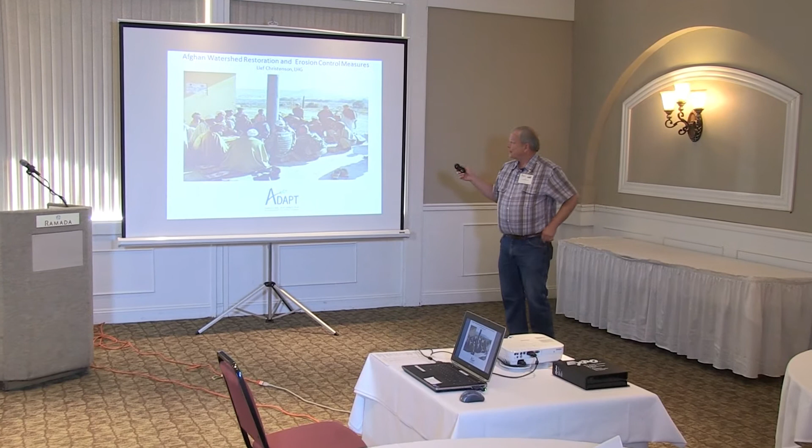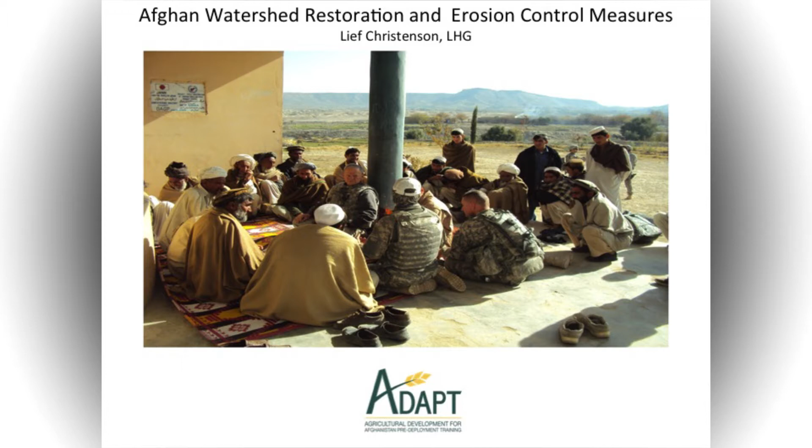Well, I've been working in the private sector for some 30 years. I'm a geologist. I've done all kinds of stuff, but mostly have gravitated toward construction management in the last 20 years. In 2008, I found out that the Corps of Engineers was looking for people to help them over there. So I found out who the lead engineer was in Kabul. I sent him my resume, and 10 minutes later he called me, hired me on the phone, and I was over there in 6 weeks.

And at that point, they put me in brigade headquarters in Khost Province, eastern Afghanistan. The map's over there, so I won't get too specific, but at the time the 101st Airborne had 6 provinces in eastern Afghanistan. And we were a center for CERP spending. Does anybody not know CERP? It's this money that's provided by Congress for us to do development work.

In 2008, our goal was to outspend everybody else. At division, we had, I think, 4 active brigades under division, and we were in a race. And by God, October, we threw our pencil down and we spent more money than anybody else. We built roads and schools and hospitals, solar-powered street lights, wells for communities, all this various different stuff.

I was what they call a brigade PRT engineer, so all the projects from the PRTs and the ADTs would come to me for review. The colonel said I had his review pen, but I seldom used it because we were trying to outspend everybody. So pretty much if you had a fairly decent set of plans and your costs were reasonable, then you got approved. It was pretty wild. I mean, we built a lot of mistakes.

When I was with the 101st, they found out that I'm a licensed hydrogeologist, so they asked me to manage a water study for them. So over 6 provinces, we did, mostly through remote sensing, a large study that looked at all the valleys and where we could put in irrigation storage dams.

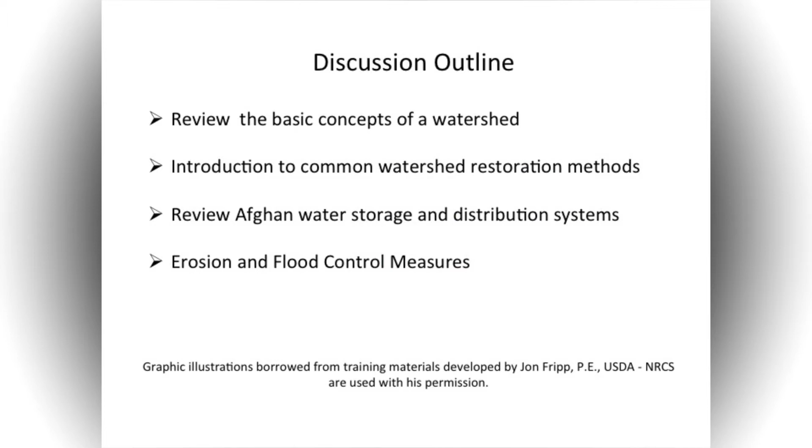What I'll go through here in the next hour, talk a little bit about what a watershed is, watershed restoration methods. We will briefly touch on water storage and distribution systems, and also a brief touch on erosion and flood control measures. Some of these things can be fairly complex, and I want to leave you with the impression that they're complex. So if you get involved in something like that, you call in a subject matter expert.

Make a note here that Jon Fripp from USDA NRCS, a good friend of mine, has provided a lot of the training materials. We had two watershed workshops while I was over there. I organized two of them, one in FOB Salerno and Khost, and then one in Kabul for all of RC East. And Jon came to both of those, helped with the instructions at those workshops, and a lot of the graphs and stuff he's developed.

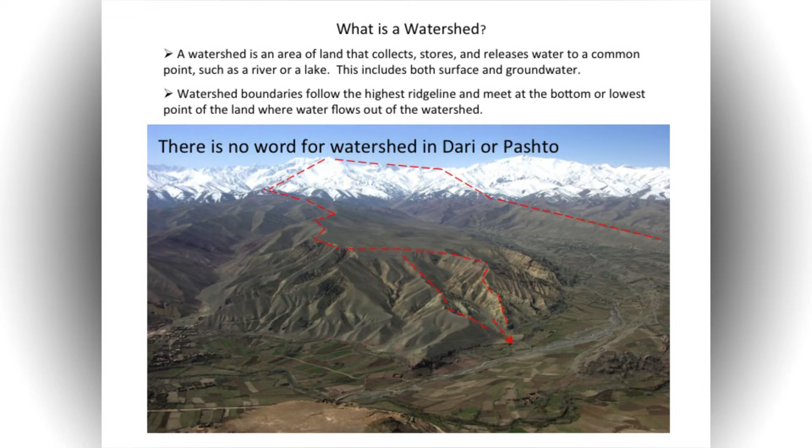What's a watershed? Now, I've never been too fluent on what a watershed actually is. I think to me they're fairly obvious. Here's the divide. Everything on this side of this divide flows this way. Everything on this side of the divide flows that way. So if you find out where the divide is, that's a huge watershed. But there's a smaller watershed right here. So, everything that falls in here is released to a common point, such as a river or lake, and that includes both surface and groundwater. We'll talk a bit about groundwater today, too. So everybody understand conceptually what a watershed is.

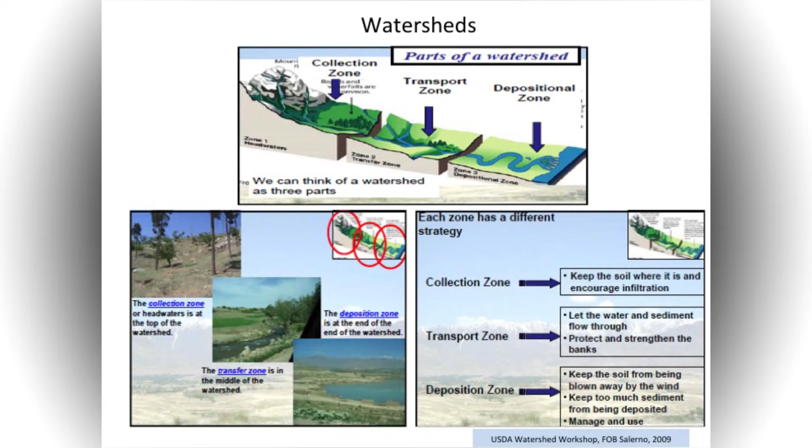We have parts of a watershed. The upper part, up in the mountains, it's called the collection zone. Down here where the rivers have formed and they're still fairly steep, it's transport. And down here where most of the irrigation is, deposition zone.

Each zone has a different strategy. Up in the top here, you want to keep the soil where it is and encourage infiltration. Most of my theme today is to slow the water down and get it to infiltrate. Because they've taken all the vegetation out of these hillsides, we want to get this water to infiltrate, soak in, and then they can grab the groundwater later.

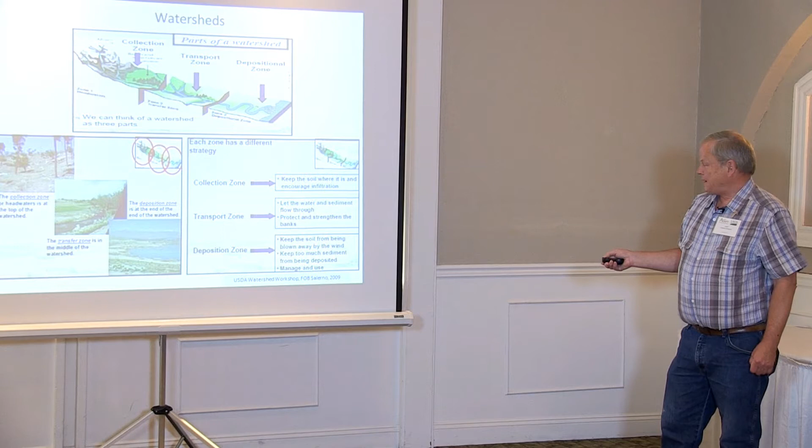And the transport, let the water and the sediment flow through and protect and strengthen the banks. This is where we'll talk about such things as riparian buffers. And down in the deposition zone, keep it from blowing away. I'm not going to talk too much about this down here. I'm mostly up slope. You have to understand the processes at work.

What do they do over there? They overgraze. If they could just, I suppose, kill 2/3 of their goats, they'd be so much better off. But if you've been there a while, you've all said the same thing.

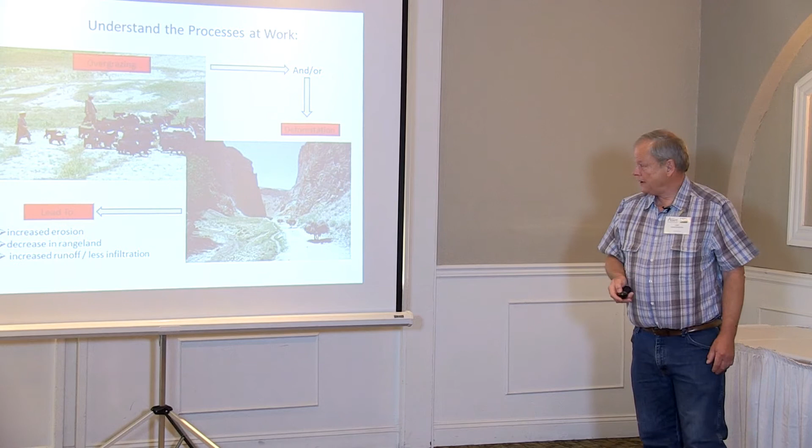Deforestation is huge. This is a picture I took up in Bamiyan province. This mule train starts at daybreak, ends at sunset. They go up into the upper watershed and haul every brush, everything they can. This is their fuel for cooking. So you're going to take everything out of the watershed, your vegetation out of there. You are going to decrease your rangeland, you're going to increase erosion, and you're going to have less infiltration.

So the basic issue, and we've known this for years over there, everybody realizes this: if you don't have the vegetation, you're going to lose 55% to runoff rather than 10% to runoff. So our main goal is to increase infiltration up there.

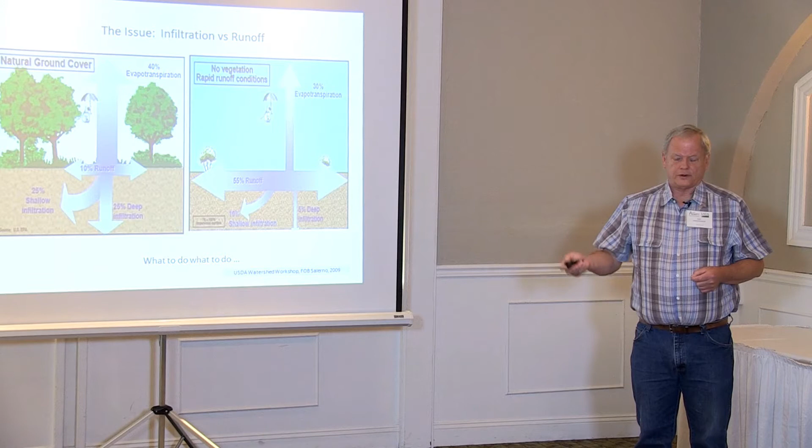There's a couple things you're called on. We need more water for agriculture. We need more water for drinking. But we also have these flash flood events all the time that take out part of the village. These flash floods are also mitigated by increasing infiltration.

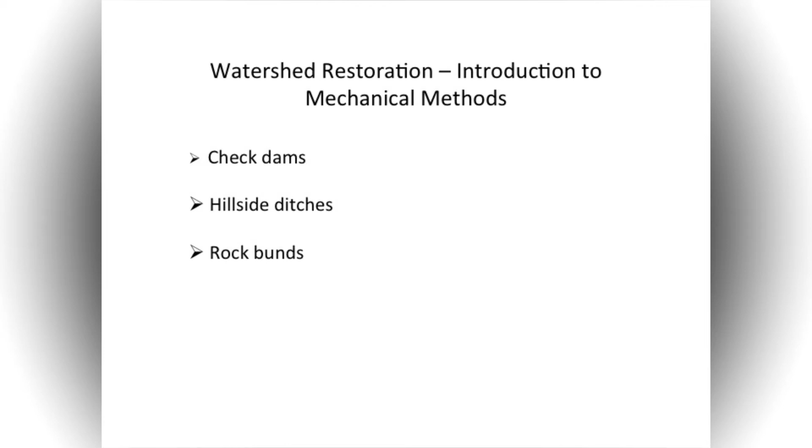I'll talk a little bit about the mechanical methods of doing watershed restoration. I call them mechanical methods. What's the best thing to do? The best thing would be to reestablish the vegetation up on the slope. Let's get rid of the goats. Let's manage our grazing. Don't have the goats eat through the seed cycle every season, and they do. That would be the best thing.

Those are political things that take a long time. Those arrangements take a long time to get these villagers to agree to. It's between them and the nomadic tribes. I've never seen anybody who could sit in there long enough to actually make these agreements enforced and keep them going. So rather than the best method of increasing vegetation up there, I'm going to talk about the mechanical methods where we can increase infiltration.

I sure appreciate if you guys stop and ask me a question at any time.

So we'll talk about check dams, hillside ditches, and rock bunds, three of the most common methods we use out there. Check dams are up high in the collection zone. They can be in the transport zone as well. Classic check dam with my friend John Fripp.

This is the noisiest slide, Colonel, that I've got, because I would get kicked out of the bub with a slide like this. But let me just read this one through, and we'll all know what check dams are now.

They're small dams. They're put in gullies. They're loose rock structures. They're not meant to stop water. They're meant to slow water down. Water can come through the cracks in the check dam. That's fine. You want to slow water down. They trap sediment. They're used in open channels and gullies.

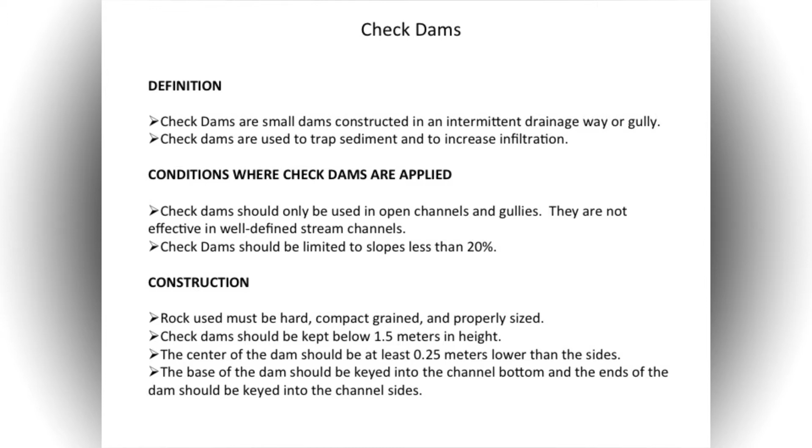I'm getting good at this.

Let's see. It has to be keyed into the bottom and into the sides. We're going to talk a lot about doing things in gullies and in stream beds and things like this. The key to doing anything in a stream bed, putting a structure in, is keying it in. That means you dig into the stream bed. You'll have to go in there a good meter or so, half meter. You'll also have to go into the banks.

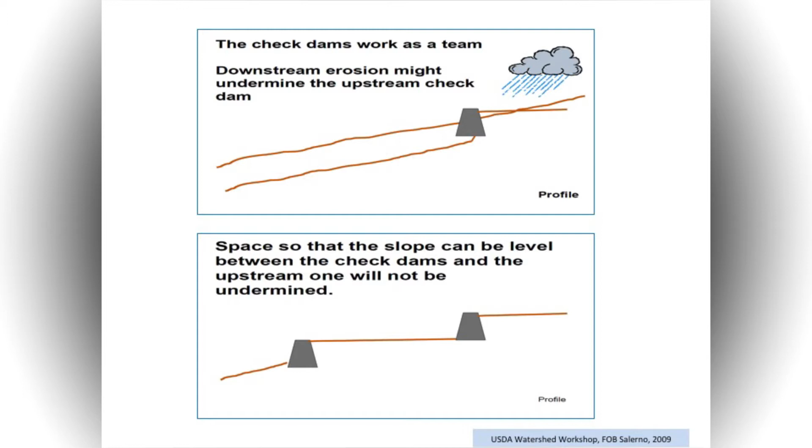Why? Because that will scour out underneath. Or the water will come around the edges, and it'll do it the first thing. If you just build up to the edge of a gully, the first thing is the water will just go around that. So you have to go to the edge of the gully and inside. So the key is the key.

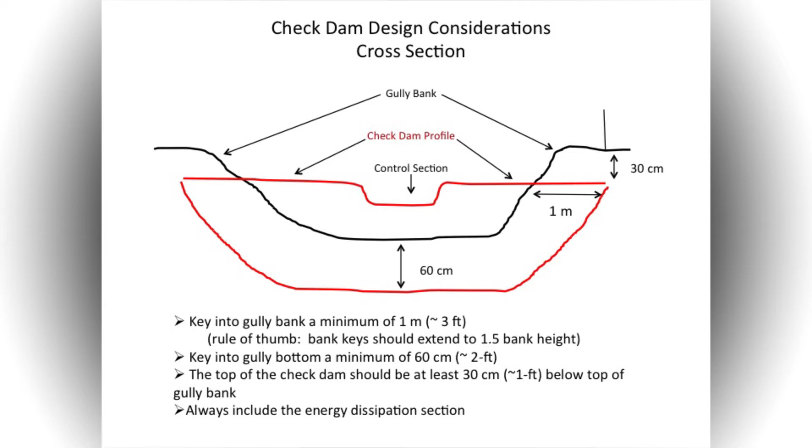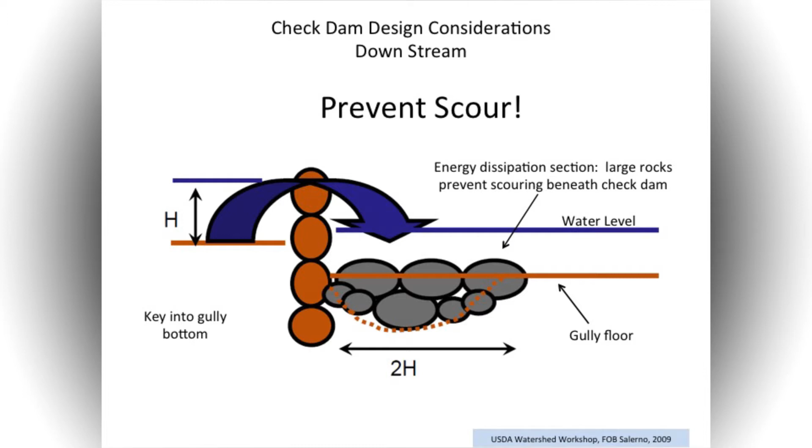Check dams work as a team. As the water comes down here and tumbles over, if you don't have anything down below, you'll get scouring down below here eventually, and you'll wash this away. We're going to do a little field exercise today. Remember this diagram, please. Generally speaking, you want the top of this dam about equal to the bottom of this dam. So depending on your slope and how high it is, you can calculate. Or I've got a chart up here that'll help you do that.

This noisy little slide just shows that this is the check dam itself. It's keyed into the sides, it's keyed into the bottom, and it's got what's called a control section in the center that forces the water out. Questions yet? All right. I certainly don't expect anybody to remember 1 meter 60 centimeters. Just dig it in, really dig it in.

As this control section, that's where the water comes out. So the water is going to come out the center of this thing. So what's going to happen? You have to prevent scour. So as that water comes out the top of that dam, build also what they call an energy dissipation section, 2 times the height of the check dam.

You've got a disc here from ADAP, and on that disc I put a lot more information about check dams and everything I'm talking about. So this is the brief overview. But just remember to go into that disc at any time. If you go overseas, you take that disc with you, probably not this big lunker of a notebook, but the disc has a lot of extra information.

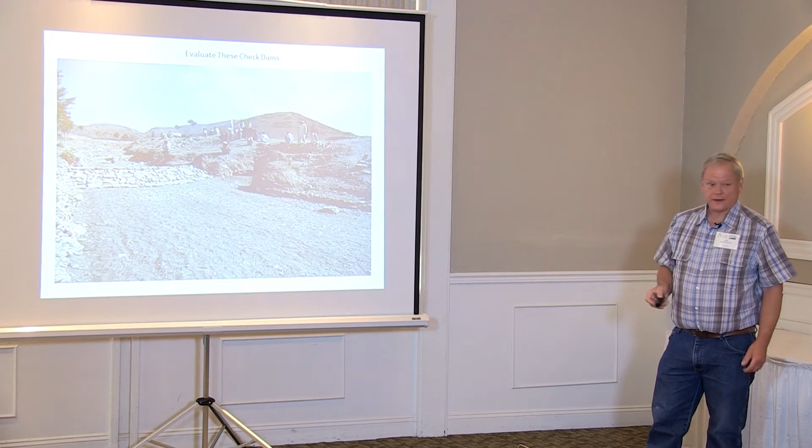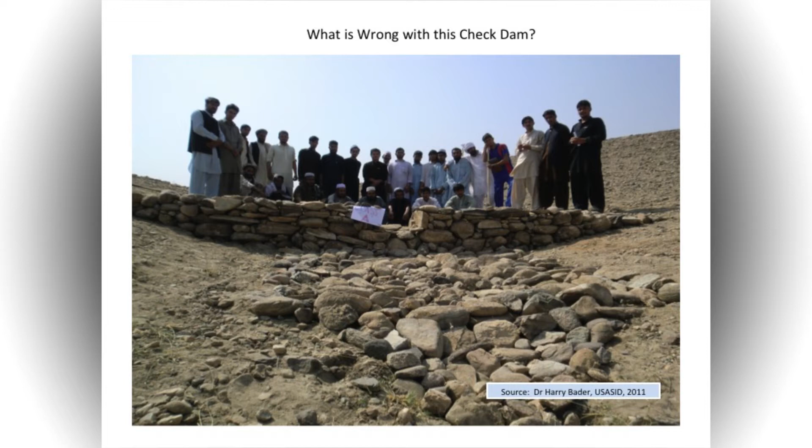So you certainly need to build a good-sized rock. You have to cut it into the banks and into there and get your control section, your energy dissipation section. You have to build them right. Okay. How about this one? This looks pretty good, except I don't know if they dug it in here or not. But this one here is a B+ at least.

Dr. Harry Bader, interesting USAID guy who worked in Nangarhar and Konar, put together what was called the Tree Army. He was just trying to find ways to put villages to work, and he stumbled across doing check dams. And he got these guys that would work together. He trained them all in classes. In fact, Harry does an hour long on his program. It's a pretty good program. He got a lot of people working together.

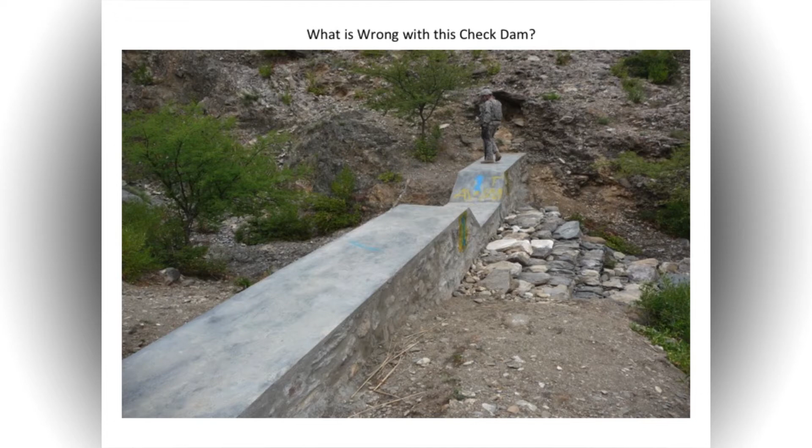I call this one the mother of all check dams. This is up in Nangarhar province, and we had to walk for an hour to an hour and a half. I mean, left the MRAPs way behind, got way up on this hillside. I wanted to see these things. The guys, they will work. They carried all the concrete and the water way the heck up this hillside and built these things up there.

You know, a check dam is meant to let water pass through. I am not in favor of doing these types of solid check dams. It was cut into the side. It was cut into the floor here. It's got the energy dissipation section.

It's got a control section. It's a beautiful check dam. I'd almost rather see loose rock that would let water infiltrate. On a dam like this and on others, when the water's going to go through this, it's going to back silt up and back here.

So eventually you're going to do something, and so going in, you're going to tell the community that eventually you're going to have to remove the silt in back of this. That should just be an O&M that they're aware of when they build these things.

Sir, I've got a question. Sure. Increasing infiltration, does that just help raise the water table? It does. It helps raise the water table, and it also stops these flash floods, mitigates flash flooding. And I'll talk just a little bit more about that soon, but the whole goal is to get things to infiltrate, not run off. You lose your water to runoff.

If it doesn't infiltrate, that one diagram that I showed, it's 55% runoff versus 10% runoff on a vegetated slope. So what we're trying to do is stop that runoff. All the water is lost to runoff. It goes down the hill, goes through the village, it goes out in the valley, and it's lost. Nobody gets to use it.

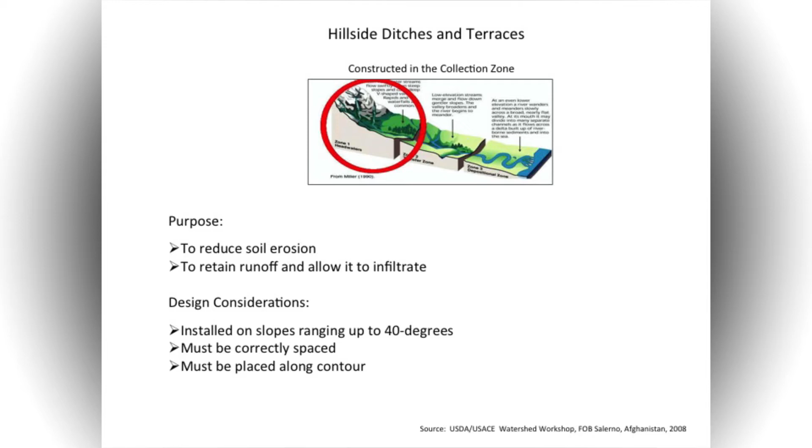So the other... Sorry, Lee. Yeah, go ahead. The thing on check dams is, it was hard for me to convince Afghans that check dams are temporary. They seem to want to build one and think it's going to stay there forever. And I was using the examples of the CCC in the 30s, going back and rebuilding them after a rainfall event, and walking the stream bed and placing the rocks back up on top, because they are really temporary structures. They're not meant to be permanent like that.

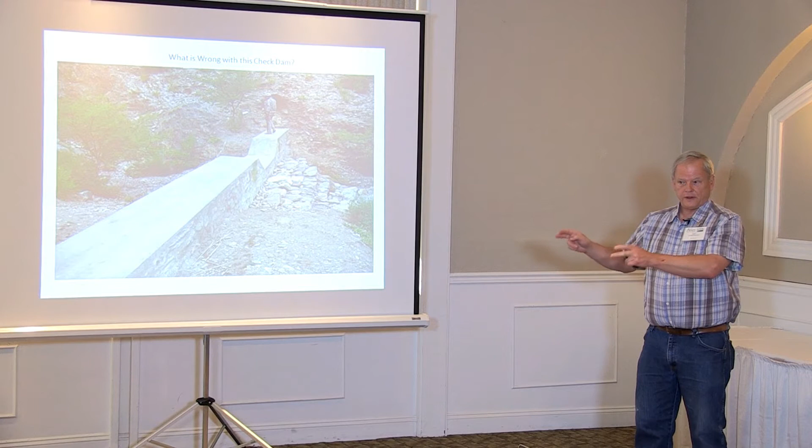Yeah, and when we approach a village about doing this, we would say it's something that needs constant O&M. Right. Every year you're going to have to go up there and repair your check dams. Now eventually, one thing is they'll fill in with silt. You could leave that filled in with silt and just make another series of check dams right down below like that. Keep doing that if you'd like. That's another way of doing this.

But they do need O&M. Some of them will wash out. Some rock needs to be moved out again. Hillside ditches and terraces. These are another way to reduce soil erosion and retain runoff. These can be installed higher on steeper slopes than the check dams. So the check dams, usually you're going up a slope like this, and above the check dams, you'll put in your ditches.

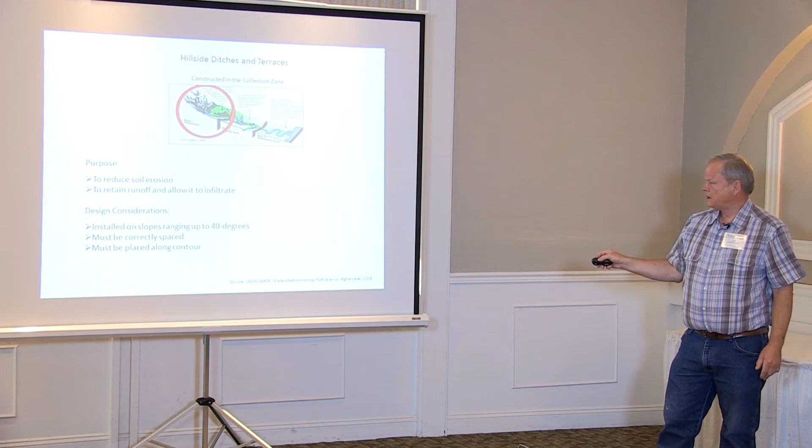Spaced, and they must be placed along contour. This is an important thing to do. We'll show you a little bit about that in a field exercise this afternoon. It's a very simple concept. These are just shallow ditches, a foot or so deep, foot and a half deep. You compact the ridge here, you excavate it here, you put it there, you just stomp it down with your feet. Every 30 meters or so, you put a ditch plug in.

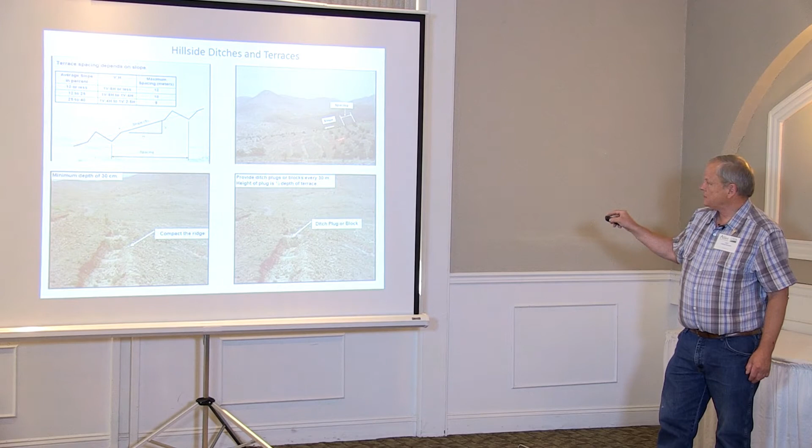These things have to be on contour. If they're not on contour, then you're going to start a stream bed and it's going to do erosion. So just to guarantee that you're not making a stream bed, you'll put these plugs in every once in a while like that. The spacing can be easily figured by this. I mean, that's not rocket science. Here's a good project like that.

In Logar and Wardak province, I worked with the Georgia ADT, and they were stellar. They put in some 12 large projects, probably put 5,000 Afghans to work doing this. We did large designs over large areas of watershed restoration projects. There were primarily check dams in the gullies and these hillside ditches.

They were very successful. I think of those 12, I had the chart and I should have brought it, I think 3, maybe 4 weren't successful for counterinsurgency security reasons. They couldn't do them all, but they did quite a bit.

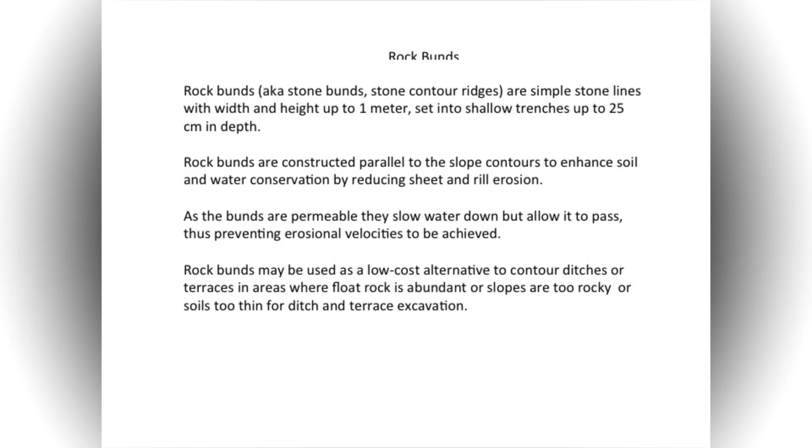And then the third method that I'll show you is rock bunds. I've never actually put rock bunds in. I just want you to be aware that this is an easy method. It's a method to be used on a slope where the slope is very rocky and you can't dig into the slope very easily. Instead of trying to dig ditches down, you can do shallow rock walls, the same spacing as a ditch, constructed parallel to the slope.

And they're the same principle. They're permeable and they slow water down. The main reason for putting in things like this is, as water runs down the hill, you always want to keep it in sheet flow. Don't let the water start going into rills, because rills will start your erosion and you'll start forming gullies like that. You put these rock walls, little rock ridges along, and it'll keep everything in sheet flow.

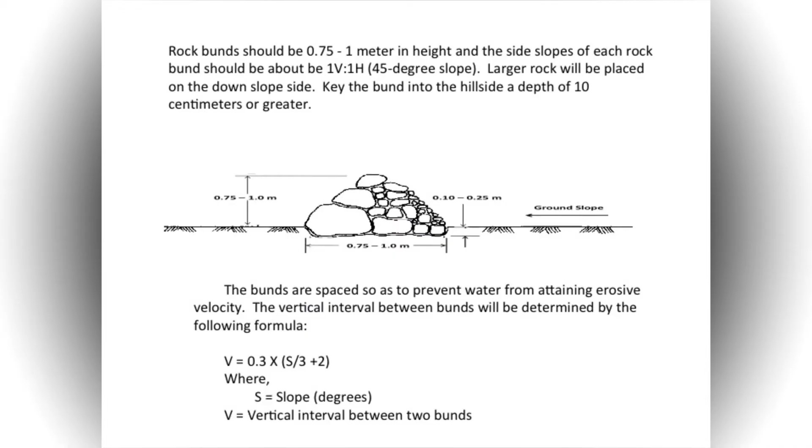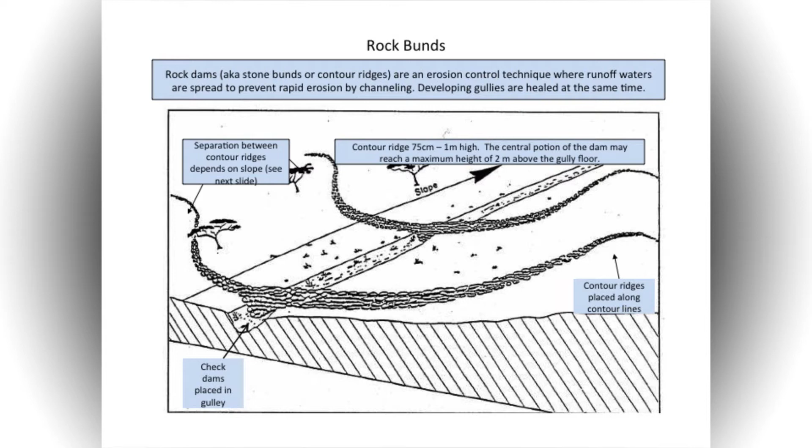This isn't just Afghan specific by any means. Africa, Somalia, these practices go in everywhere. You people in civil affairs are going to be around the world. Keep this stuff close to you. Someday look at that disc and the other information I put on this disc. I think you'll find some useful stuff for your trade.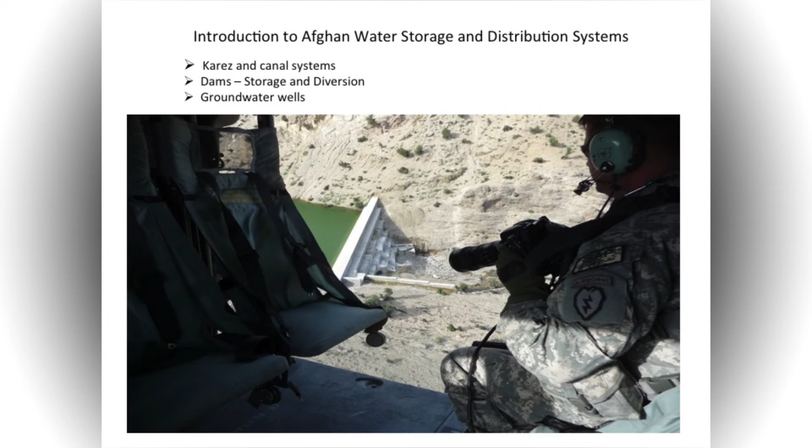A little bit about the Afghan water storage and distribution systems. I think half of you have been to Afghanistan, so you're familiar with some of these Karez and canal systems they have over there. Briefly, a Karez. These are remarkable structures in Afghanistan. They're very old. I don't think any community I ever went to knew what age their Karez was. Most of these were built hundreds of years before they were born. I understand there's families from Iraq or Iran that can still do these, but I don't know of any that have been constructed in the last couple hundred years.

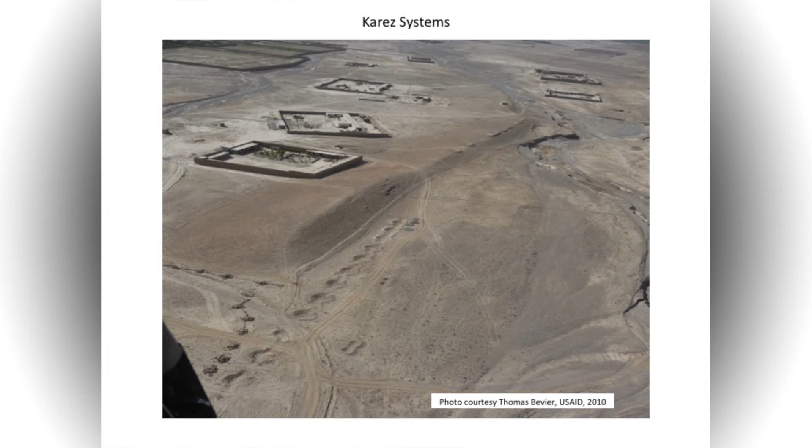What they do is they go up onto the hillside, dig a mother well to find out where the water table is, go down below the water table, and then bring that water out at a shallow angle so you can get it clear out here. And all the way along, they put in access shafts. You see these access shafts from the air. They look something like this. You'll see these things run for miles out into valleys. It looked like bomb craters. And some of them are ancient, maybe 1,000 years old, pretty amazing, remarkable systems.

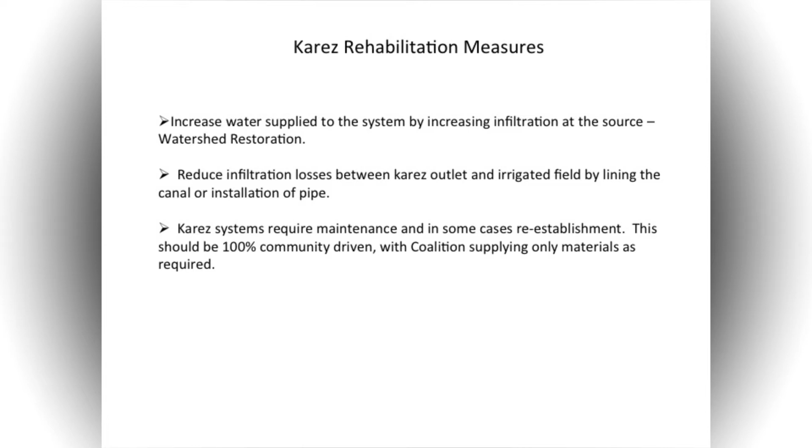A couple things you can do about rehabilitation. This is where you want to do your infiltration up in the hills, because that'll increase the groundwater and increase the flow to the Karez systems. When I targeted a watershed restoration project, one of the best targets I could find were the hills above Karez systems. We would chart where the Karez systems originate, and above those hills put in your ditches and check dams. So you increase infiltration, you increase groundwater, you'll increase flow to these Karezes. That's what we did a lot with the Georgia ADT in Logar and Wardak.

Another thing is to reduce the infiltration losses between the outlet where the Karez comes out and where it's distributed out to the irrigation canals. You can do things like lining it with concrete. They require maintenance every once in a while.

One of the things we used to do under the CERP program was pay the villages to do their maintenance. It became very contentious with the ministries in Kabul, who hated the military for paying them to do their own stuff. They thought that shouldn't be done. The reason why, for the most part, was you're trying to make an inroad into that village and establish some bond with them. One of the easiest things was to pay them to clean their own Karez systems out. They should be doing that themselves.

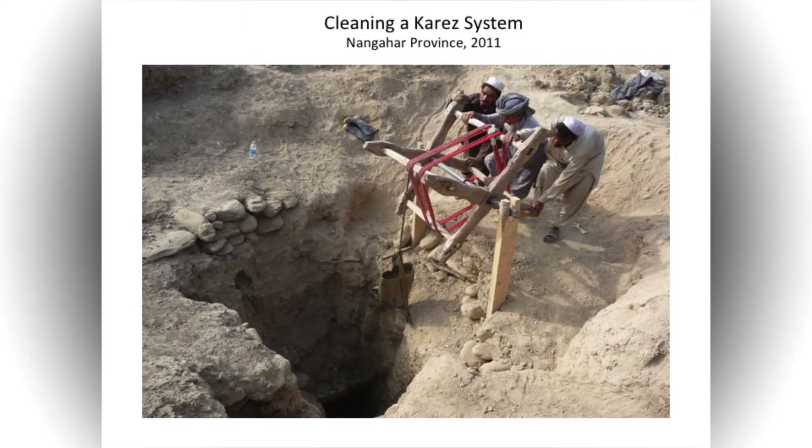Cleaning the Karez system. They've got the old boys on top, and they've got a kid down below, about 12 years old, down here in a tunnel about like this, you know, digging it out. It's freezing cold down there and it's wet, but not OSHA approved.

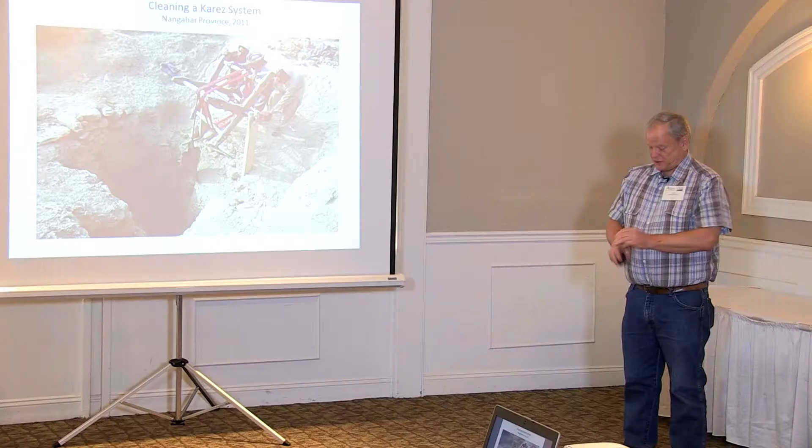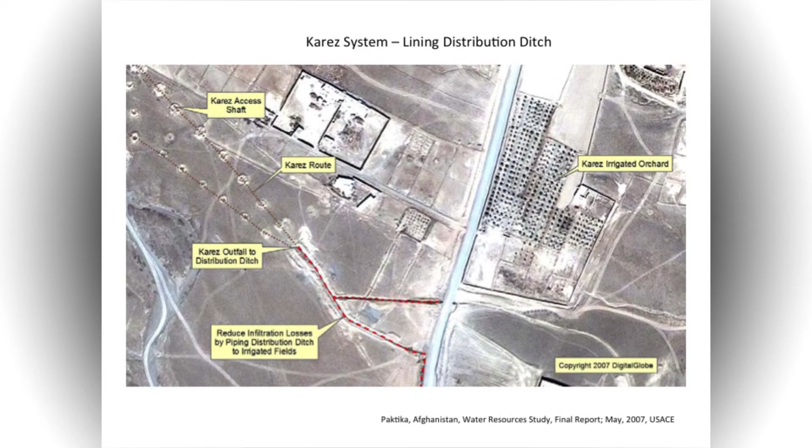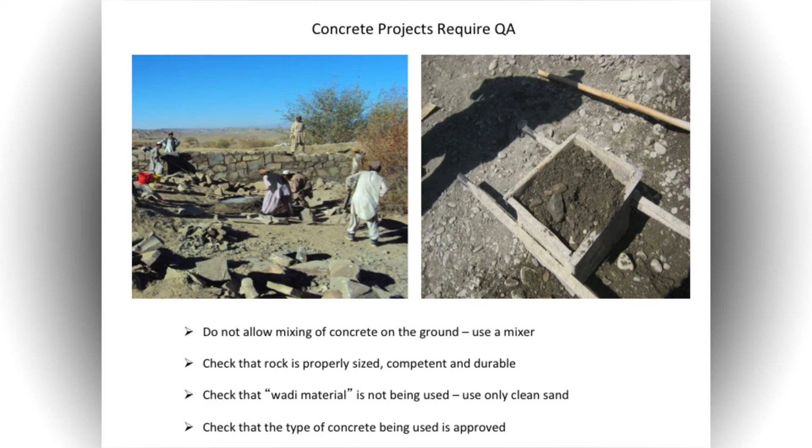Here's what I'm talking about: the Karez system is coming in like this, and from here it's being distributed out to their fields. And this is where we do concrete lining, so they reduce infiltration losses on your canals. Now, this is simple. This is what you can do, concrete lining of things. We spent so much money concrete lining over there that I will talk a little bit about concrete lining later. But anyway, sorry about that.

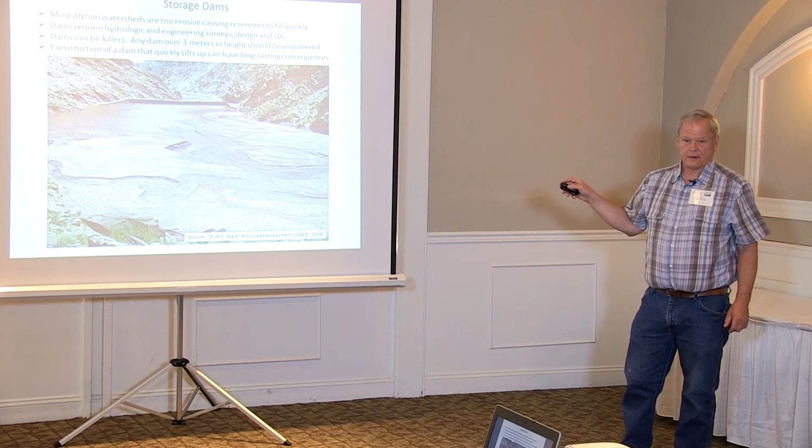These things fill up. And that's what I was talking about in the first part. The watersheds are so erosive that these things can fill up. But this one here was reputed to have filled up within 2 years. And I've got pictures of a dozen dams like this in eastern Afghanistan. I don't have a picture of a dam in eastern Afghanistan that retains 50% of its storage capacity. In fact, about every dam that I saw over there was completely stuffed with sediment and no longer worked. But it's one of the most requested things.

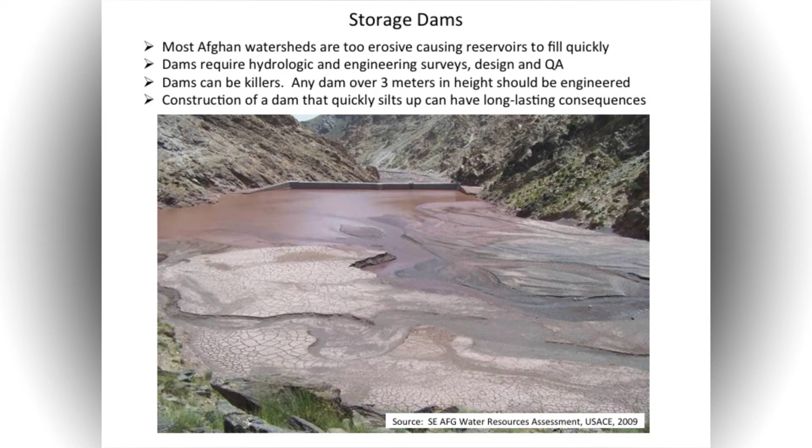So if you're out in the village or talking to the ministries, they'll want you to build dams. And we've come back to them and said, well, you have to fix your watersheds. You need watershed restoration projects, check dams and stuff. And then that filters down, and here I am out in the village, and the guy wants a check dam. The terminology has become pretty common over there. Check dams, watersheds, but they don't understand those terms. They just know that we won't build these things anymore. And this is the reason why.

A couple things here. Of course, the watersheds are too erosive. They require hydrologic, I never said that, even though I am one, and engineering surveys. Didn't that seem obvious, you know? But where is that picture?

That one there. This dam: in 2008, I was in Khost province at brigade headquarters for about 3 weeks. Brand new at the job, didn't know a thing about what's going on. And I was caught in the hallway by the local PRT commander and DAIL for that province, and they said that they want this dam built. They had a kind of sketch cartoon of a dam design. She was a stellar commander with a great reputation and very eloquent. And pretty soon I'm in a room signing, okay, yeah, we need to build this dam.

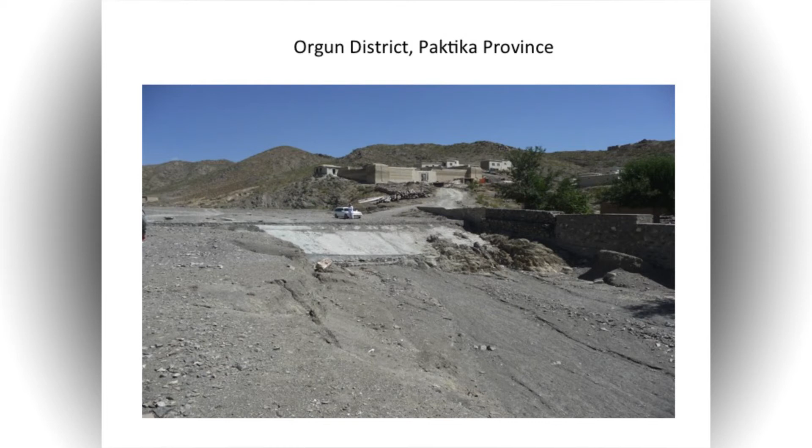Some of these places where I'd go, I'd try to figure out what the heck was going on. What happened here is they built this dam here, and I think they had a canal system that they were going to run off this way. It was hard to tell, it was so filled in with silt. But if you build a dam like this here, now you've raised the stream bed.

So what the stream did then was cut over this way, down into here. That's where the village was. Now the village is being washed out because this dam is here. How do you fix this? I said, well, do you have explosives? How do you think you're going to fix it?

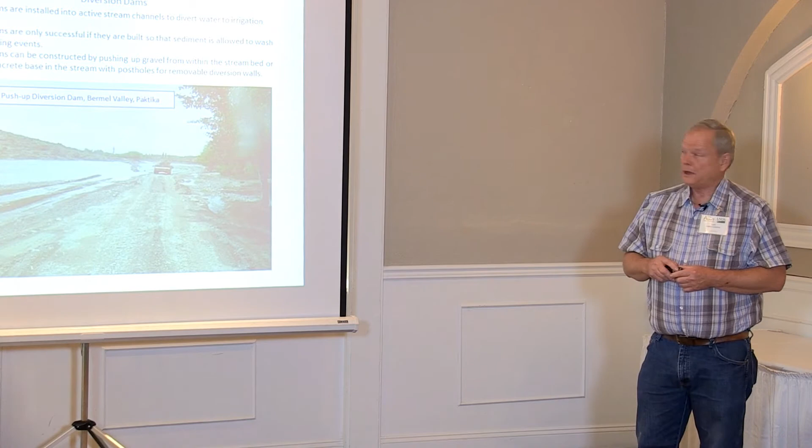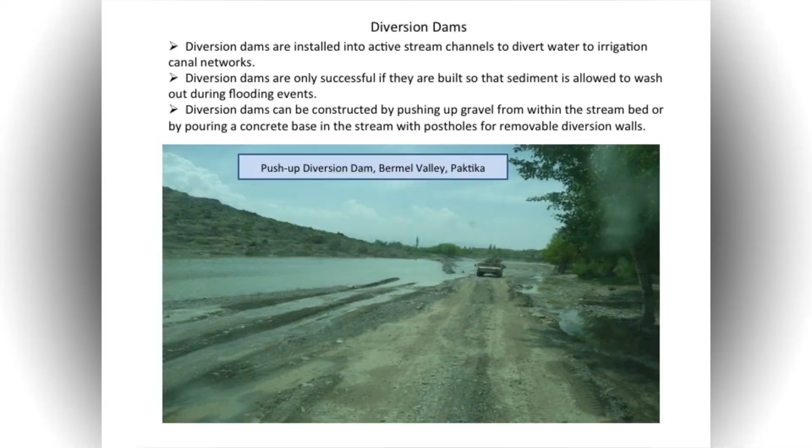from a stream, and the stream's running here, so they will put in some sort of a structure like this. Then they'll have a canal, and of course that'll branch out to their canal systems like this. So you're going to put in a structure here for diversion. It's going to make the water come here and go out this way, right? Diversion dams.

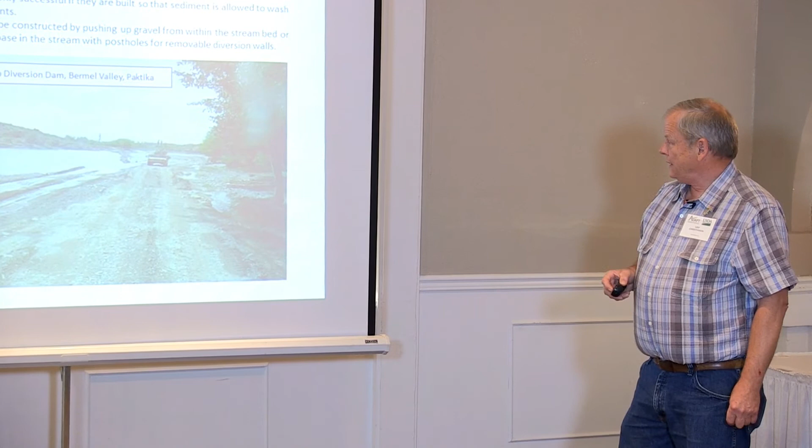What we've done with diversion dams is they want concrete diversion dams. They want permanent, nice, beautiful things. But a concrete diversion dam fills up with sediment the first flood season. They fail 100% of the time, not sometimes. They always fail.

So the best thing is, and this is taken out of the back of a Special Forces vehicle, not a good picture, but the best thing is to just push it up with a dozer or something like that, and then it goes out this way to their systems. That way, in the spring, when you have flooding, it'll blow this thing out of there, and it's all gone. You start up again next year with pushing this stuff up.

Now, I don't know if in California you can actually get a dozer in your river and push sediment up like that. But you can do that. All you do is you tell those fish to put their goggles on and get the dozer out. And so diversion dams are only successful if they're built so that sediment is allowed to wash out.

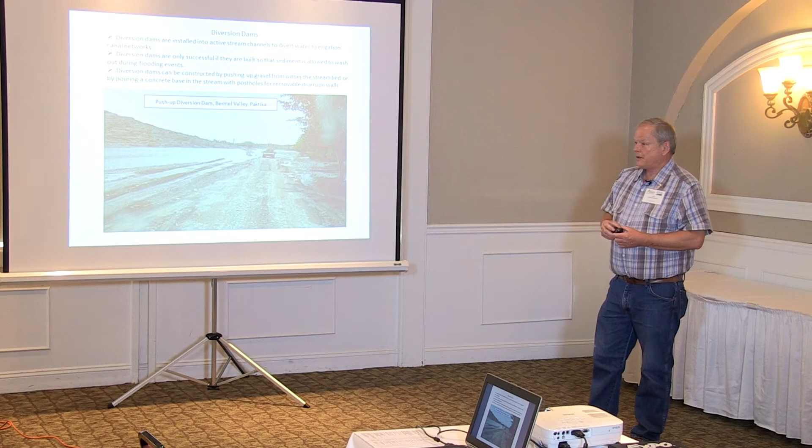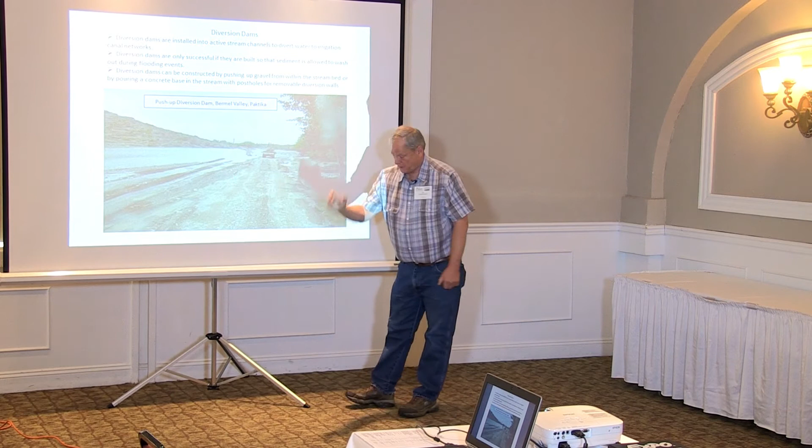Another way you can build these dams is to come in here at the stream bed level and put in a concrete bed with post holes in it. That way you can put in posts and batten boards every year, but you'd have to pull that out at the end of the irrigation season. Let the gravel go through. If you build a concrete diversion dam, they always fail.

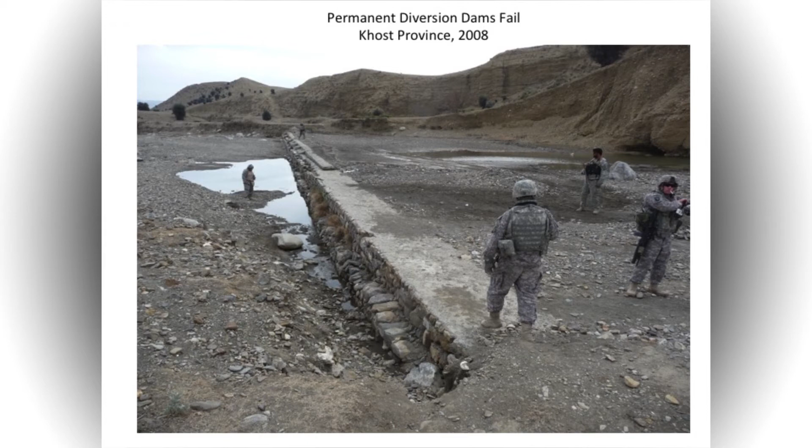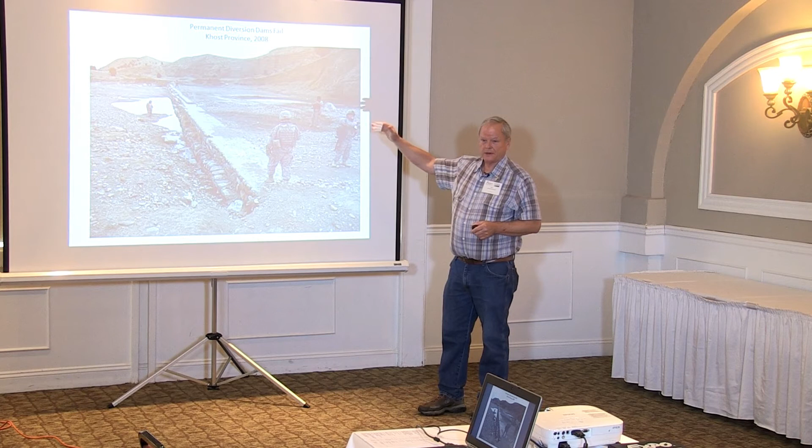Now the river used to come through here, but we built a concrete diversion dam. We actually raised the bed of the river here. The river is now clear over here, and the canal system they had going over there is high and dry. Because by building this, we've raised the bed of the stream and moved the whole shooting match that way.

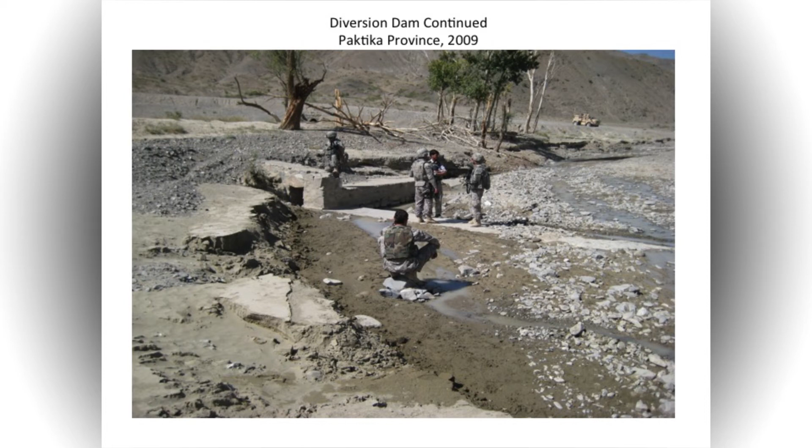Sometimes you go out here and I do what I call forensic hydrogeology. You can't even tell what was actually meant. But I guess this was a diversion dam here. Here was the canal works that headed out that way. They all fill up. That's a repeat.

Yeah, just diversion dams. I had USAID people who, I would also review their projects when I was at Division. And this one $21 million project they wanted to do, 21 $1 million concrete diversion dams down this river in Kapisa province. Well, it's easy, we've got remote sensing. It's just great in Afghanistan.

So I just went to the remote sensing database, pulled up the river, pulled up the picture, showed him the failed diversion dams that were built just a couple of years prior, and sent it back to him and said, this is my review of your project. You can't do these things. They don't work. So, okay, I think I've said that.

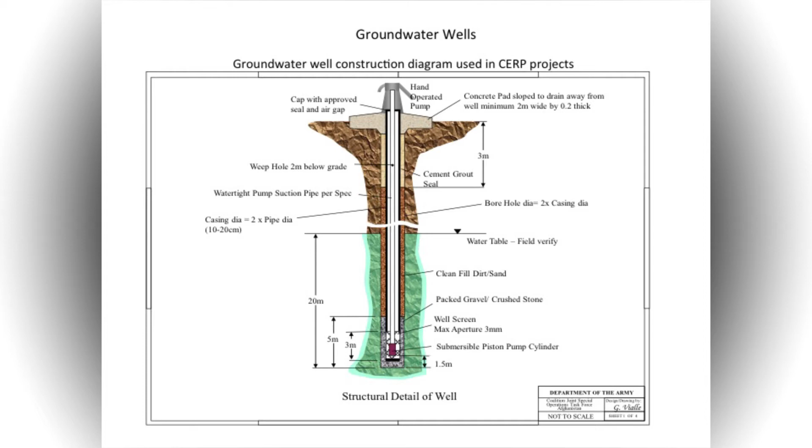Groundwater wells, I'll say a little bit about these. We put in groundwater wells everywhere. This is probably the most requested single item project we've done in Afghanistan. So I'll tell you just a little bit about it. As a young geologist, I would sit here and log these wells, and I'd make sure that your gravel pack is in and all the depths are correct, and down at the bottom your well screen is put in here with packed gravel and crushed stone around it, all that stuff.

In Afghanistan, nobody's ever logged a well, as far as I know, unless it was put in by the red team in the military. The only thing that I would really say, if you're there, make sure that you have a good concrete surface seal. These things are actually conduits to the aquifer. If you don't have a good seal up there, any spill, any surface runoff, any crap can go right down this space and go right into your groundwater. So always make sure you have a good seal around the top.

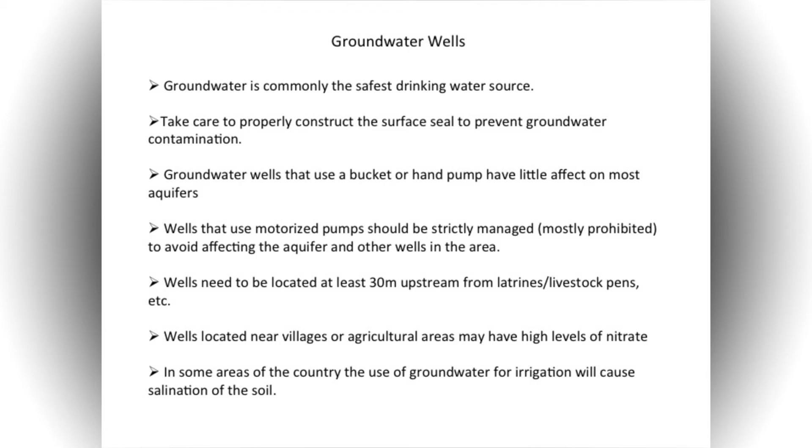Lee, in RC South, there's like a moratorium on groundwater wells. Excellent. People have dug so many wells, they're just sucking the country dry. So now there's virtually a moratorium on. How do you feel about that? I heard you say excellent. Well, I don't agree on a complete moratorium. Let's go through this. You need the groundwater wells. They're the safest drinking water source out there, and the most common drinking water source. They have to be properly constructed.

Here's the point that I'd make, Charles, that if you use a hand pump on a well, you're not going to stress the aquifer. What your moratorium addresses is wells that have motorized pumps. I would never approve a motorized pumped well in all of RC East, not one. There was a school, I'll take that back. The school in Khost was right on the riverbank. They could put the well just about in the river and pump out of that. That was the only case.

No motorized pumps. For the most part, the soil is a silt clay. If you motorize pump that thing, you will pull all these fines into your screens, and you'll clog it the first day. So if we put wells in a village, and they tell us a week later the well didn't work, we know what happened. And yes, we have put in wells multiple times. There's a refugee camp, I'm thinking in Gardez, where the well went dry, so we put one 10 feet over the next week, another 10 feet the next week.

Well, here's a good point. At least 30 meters upstream from latrines and livestock pens and stuff. I was in Bamiyan, stopped at a school we were building, and there they had the well about 10 feet downslope from a 6-stall outhouse. I hope they moved it. I requested they did.

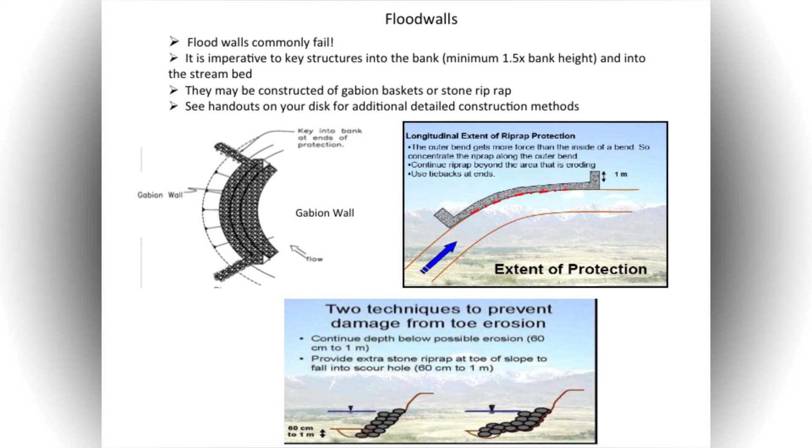Usually constructed of gabion baskets. Now we can do stone riprap, and in the disc I put together some guidelines for doing stone riprap. I won't go into here, but gabion baskets are. It's amazing how many of these flood walls have been built. It's probably the second most requested thing from the DAILs is to provide us with gabion baskets, and some of those DAILs have 30 or 40,000 gabion baskets in back of their shop that they sell and probably skim the money. Does everybody know what a gabion basket is?

I'm sorry. These are wire cages. They come in Afghanistan folded together. You unfold them, and they're basically a square at that point. You take wire and you wire them together, wire the sides. They're loose. You use them because on the outside of the gabion you can use large rock, but you can just fill the inside with small rock. So it's like building a big boulder. We use them here in the States quite a bit too.

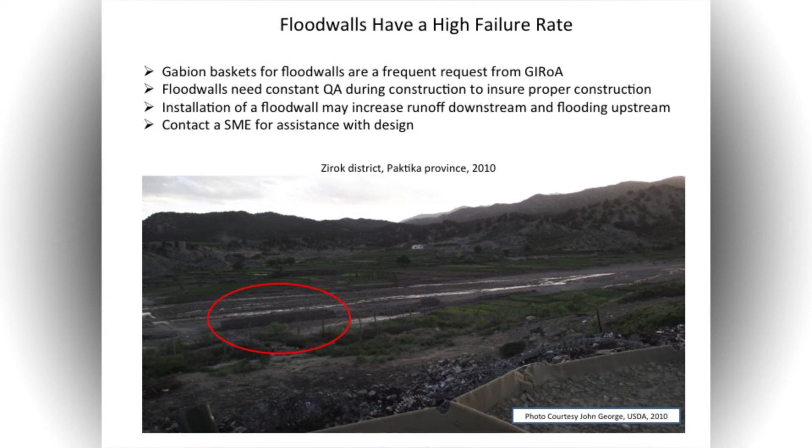High failure rate. I don't have a lot of pictures. I wish I had as I was driving around. But driving around, you will see gabion baskets out in the middle of any wadi in Afghanistan. I'm saying just about every wadi has these things out in the middle. This is another forensic hydrogeology thing. You'll be driving along and see gabion baskets out in the middle of the wadi, and you're wondering, was the stream bank there at one time or what? You know, these things fail all the time.

The big thing about a flood wall is the QA. I'm telling you, it needs to be cut into the bank and cut into the stream bed. You have to ensure that on a project. And basically, anytime you're going to do it, why don't you get hold of a subject matter expert?

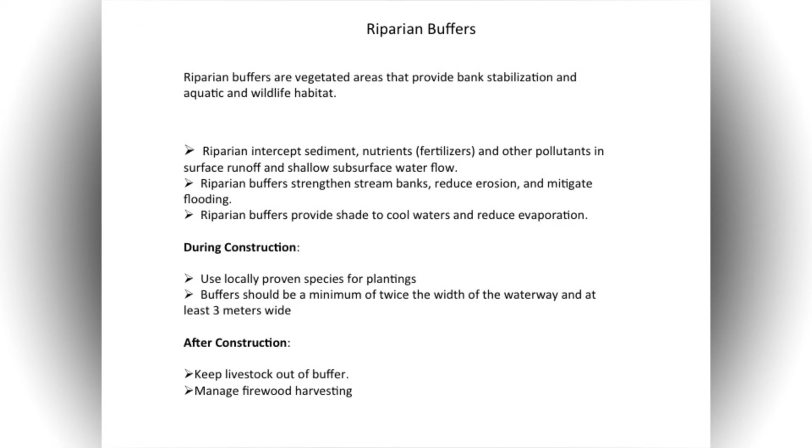Another erosion technique are riparian buffers. These are good projects for local villages. They're tough projects. You know, a riparian buffer is just the edge of your stream. You have vegetation along the edge of your stream. It protects the stream bank. It intercepts the sediments. It also intercepts sediments coming down from the hillside. You know, it cleans it up. If you had fish, it shades and cools the stream as well. But they're really good for controlling erosion.

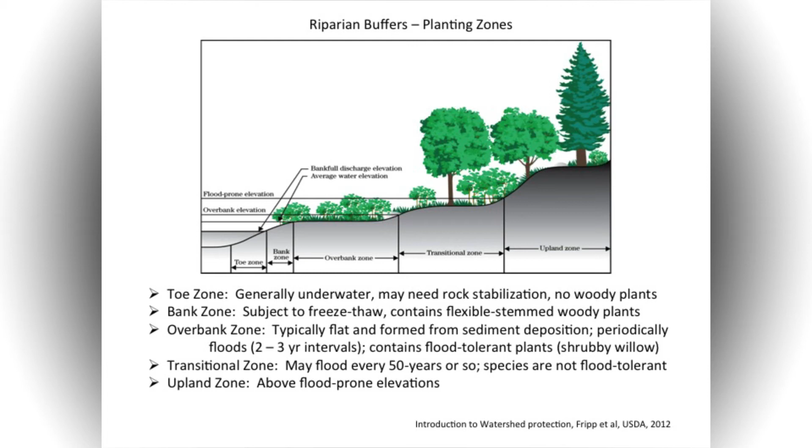What you plant in there is locally proven species. About those species, you probably want to do more trees than bushes. If you put in willows, they might be more susceptible to being pilfered, whereas a stand of trees has a little bit more respect and a little bit more ownership to it. I think, Charles, you speak to that a little bit, and certainly John Groninger will.

After construction, keep the livestock out of the buffer and manage the firewood harvesting. These are issues you'll have to deal with prior to even doing any of these. Briefly, the riparian buffer where you'll be working is pretty much the overbank zone here, trying to keep this vegetated and perhaps planting trees up into the next zone as well.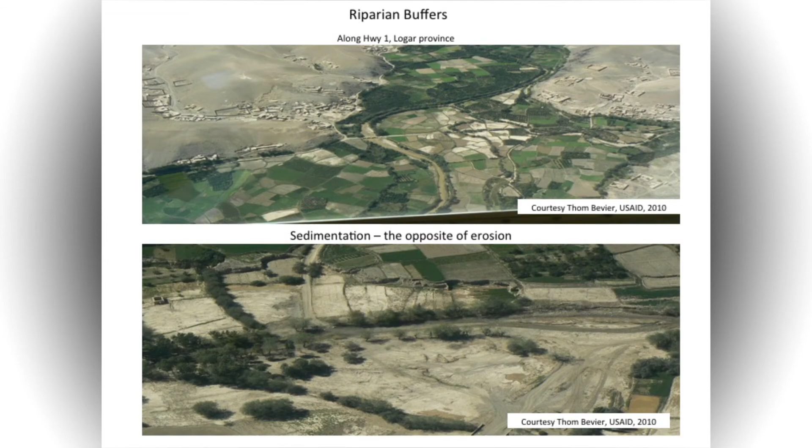Here's a cute little erosion control method, and nobody's heard of this, but it's actually very successful. Stream deflectors, they're called stream barbs. They have these names called bendway weirs. If you ever Google any of these names, boom, you'll have just a body of information you can't believe. The basic concept is the stream goes like this. The water comes in here, but it comes off these things perpendicular. So you're building like a rock, a gabion wall or something like that out into the channel.

Of course, when you build this, you have to what? Key it into the bank. You have to key it into the bed. But you put these in here like that, and it'll throw the water this way, and it'll make sediment fill in here and here. Where you have erosion in something like this, you can actually fill this in. It'll start filling in. So you can stop the erosion of this bend in the river like that.

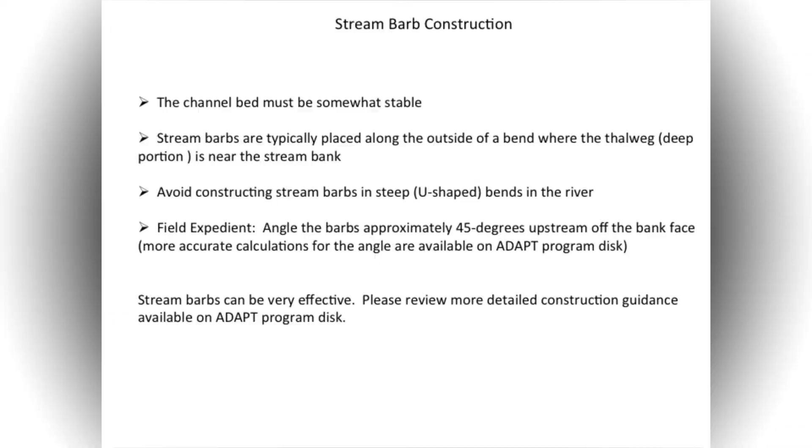There's some guidelines. You can really get wrapped around the axle on what the angle here is and stuff like that. Of course, the Corps of Engineers will do 4 pages of calculations. I'm going to tell you 45 degrees, let's do that. It's field expedient out there where you're at. So if you just tip them up 45 degrees, they'll be successful enough. Channel bed has to be somewhat stable. You can't do really steep U's. And they can be very effective. There's a little bit more guidance, of course, on that disc again.

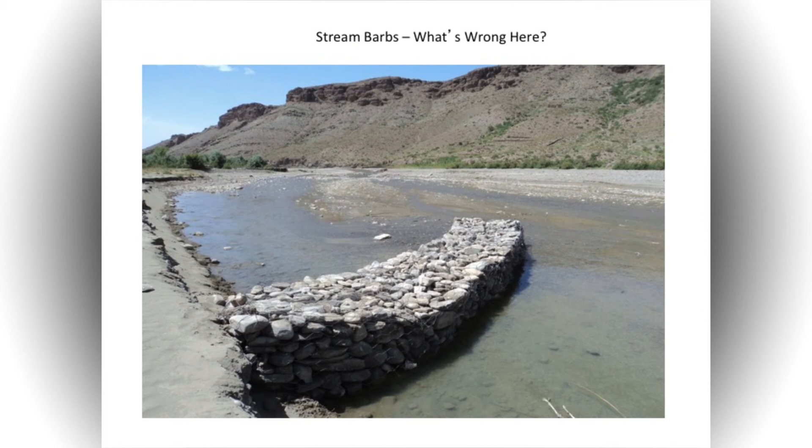The river here in eastern Paktika is flowing this way. I'd like a couple comments on this if you got them. Doesn't look like it's in the bend of the stream, so it seems kind of out of place. Well, yeah, you can't tell that very well, but actually the stream did come through this way, and they were doing this because this farmer and the series of farmers that are over in here were complaining they're losing their farmland. The river used to be out this way, but it's cut a bend in right here, so they're putting these in. And again, the river's flowing that way.

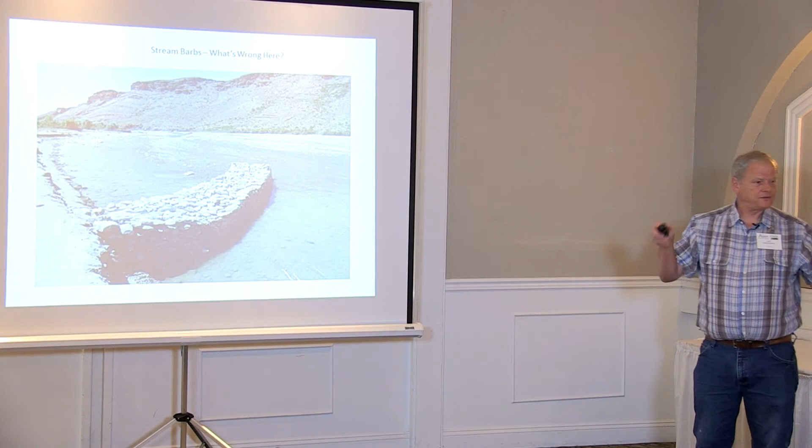Any comment? It's going the wrong way. Who said that? A student. It is. They put the barb in the wrong way. A couple other things here. Not keyed into the bank. That's what I'm trying to get across to you folks. Key everything into the banks. This is just horrible to see it just stop at the bank here.

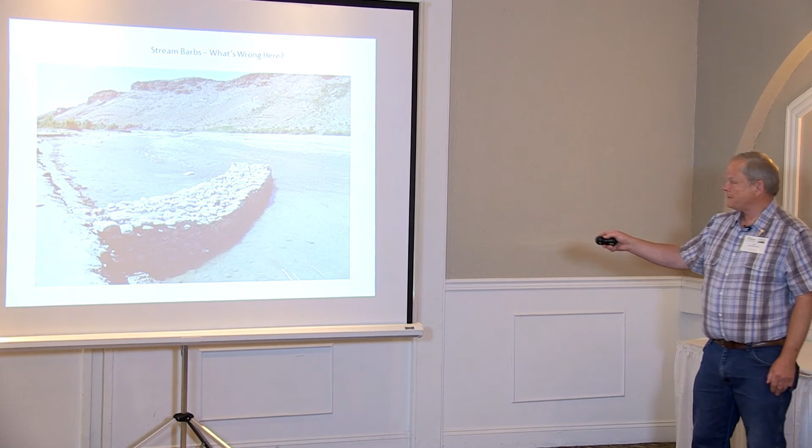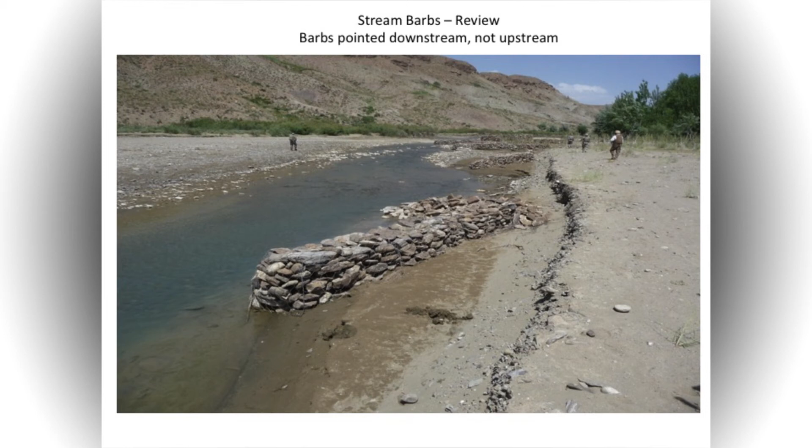Anything that's built like that, the water will just cut right around it, and pretty soon you'll see this thing sitting in the middle of a big wadi. The bank will be over here somewhere, and you're doing forensic hydrogeology, trying to figure out what the heck this thing was in the first place. It's not keyed into the bank, it's not keyed into here, and it's bent the wrong way. So let's turn around and take a picture upslope to see what it looks like. And here they are, all pointed downstream, but they worked. The water comes down here, it comes off perpendicular, and instead of stopping erosion for this farmer and this farmland, we've increased the erosion here.

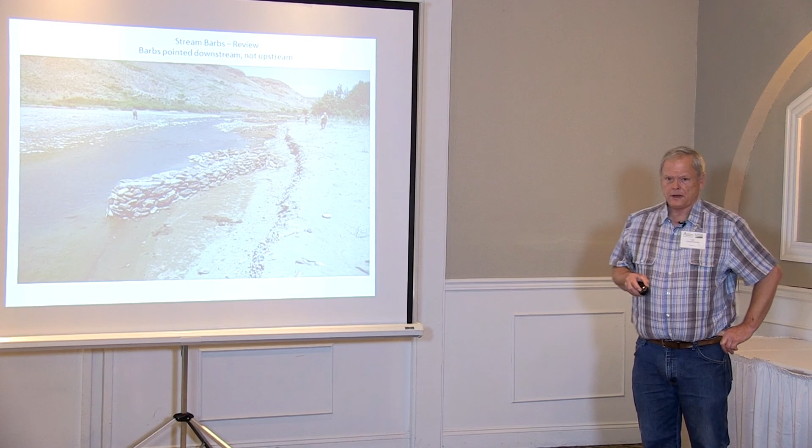This was actually done under the supervision of a USDA NRCS person. So what are you going to do? Certainly civil affairs, something like that, you would lean on your civilian advisor. Maybe look at your disc that is provided and double check things like this, because this is a nightmare. Wait, that looks like a wing dam. A what? A wing dam? There's a series of them here. Here's one, here's one, here's one. No, they'd put in barbs. None of them keyed in, of course. But for the most part, angled downstream hasn't worked for them. Any other questions about barbs? Okay.

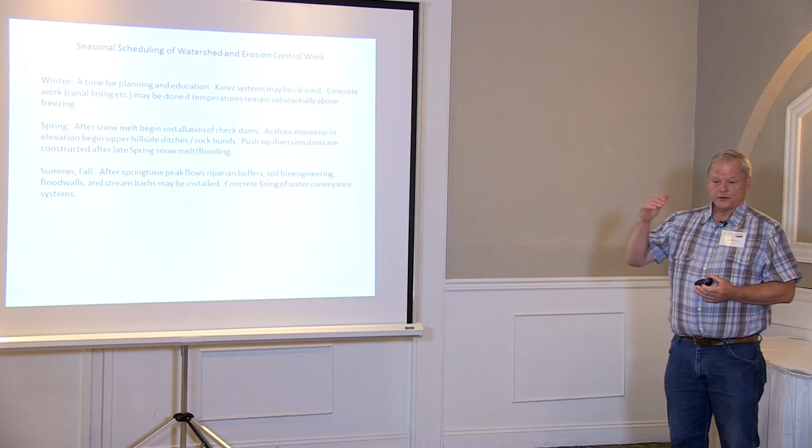In the spring, as the snow melts, you can start putting in your check dams. Your hillside ditches go up in the higher elevations, your check dams below that. In the summer and the fall, you can do your soil bioengineering. That's the riparian buffers, stream barbs, flood walls, concrete line.

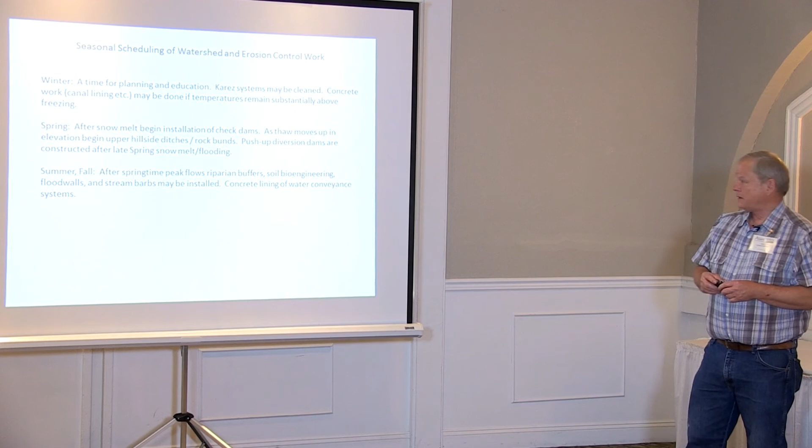So just in summary, I really want to say good design, that's what we started with talking about. The training of the workforce and appropriate QA. That means if you set up a large project, you have to go out there and make sure they do it right. Keep it simple. Keep it community oriented.

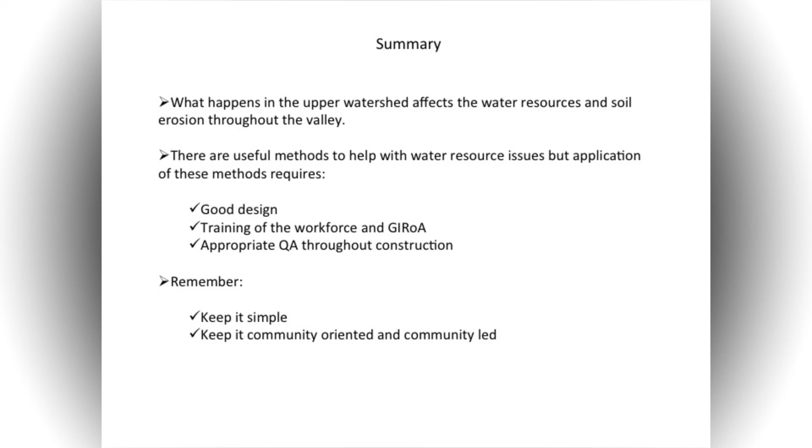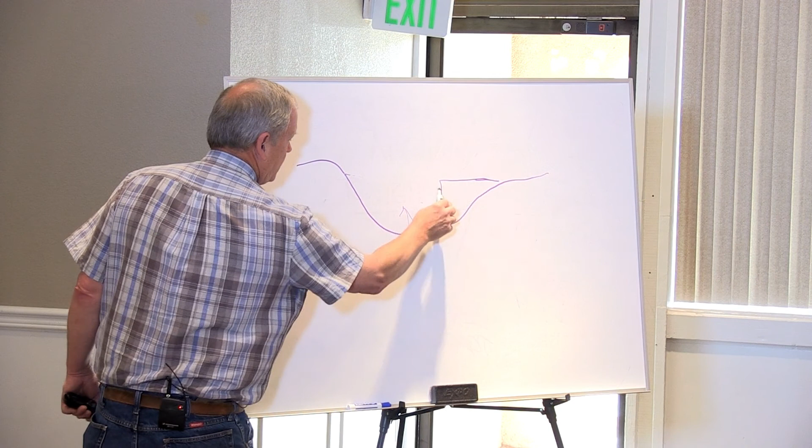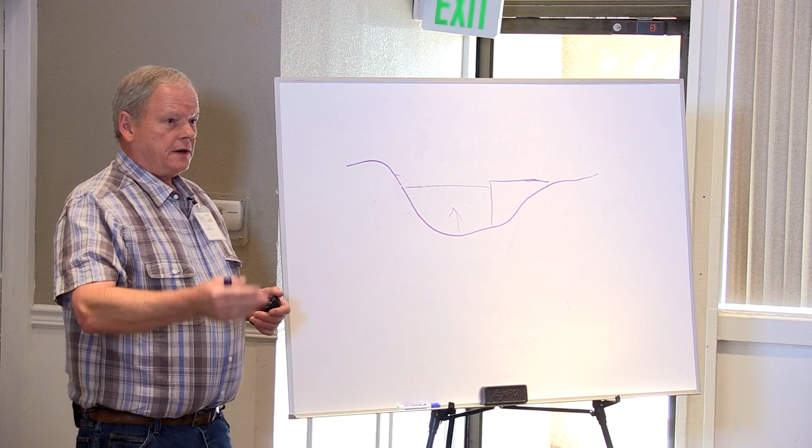Actually, what this does is raise the river level, and so downstream and upstream both are affected. Downstream, the river's going to raise and it's going to flood. Now, you might have protected this guy's property with a flood wall, but that's pretty temporary. You're going to destabilize people both upstream and downstream. So that's why you want to use a subject matter expert to evaluate something like this.

Remote sensing is a great tool too. You can look at the gradients and you can look upstream and downstream. What would happen if I put in a big flood wall here? Is it susceptible to blowing out some village downstream? It's usually something I say when I'm talking about flood walls, and it just came to me.

Any other questions? What you're saying then is that given the change of mission, Afghan First, the funding available for water type projects is probably on the wane here.

So I guess the key message here for our folks is that water is probably going to come up during your discussions with DAIL or communities, but it's more or less going down a checklist, looking at what has been done in their areas, correct? And seeing, if they're not working, how to deal with those things. Yep, a lot of that.

But also a lot of these projects are not expensive. Let's say that you do have a small budget. Well, what can we do? We can do things like: we'll buy the concrete if you will do the lining of the canal. But if you're going to do that, I want you to put a couple check dams in up here. So for a couple thousand dollars' worth of concrete materials, they don't have a couple thousand dollars.